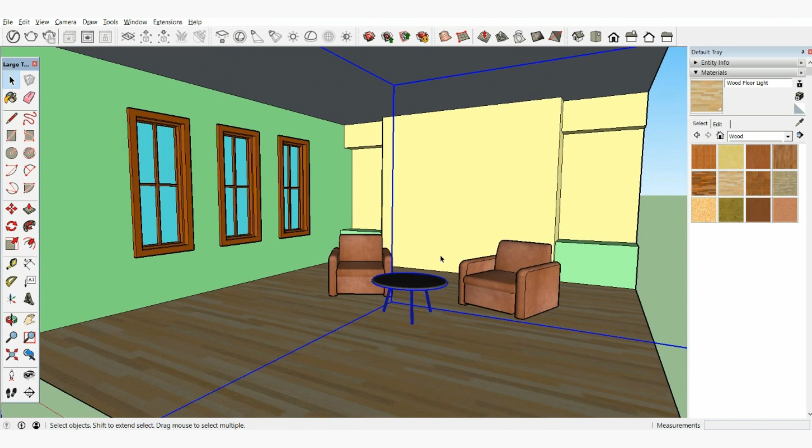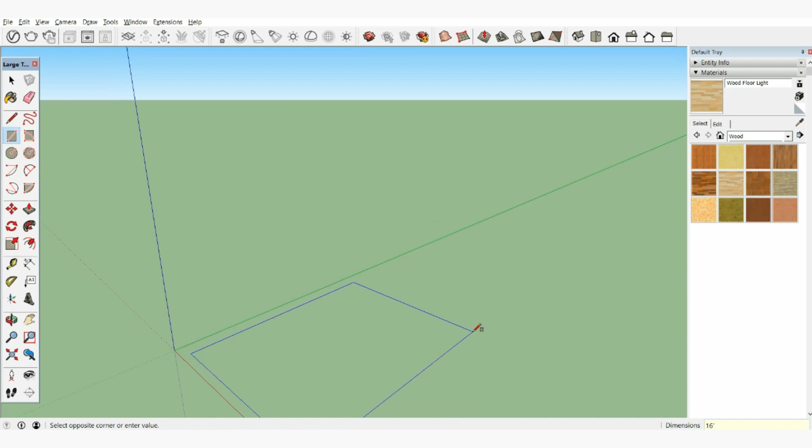If you were creating your own space, the first thing you need to do is to take some basic measurements of the size of the room and where the windows or other prominent elements are to accurately recreate the space. We know how to draw accurately in SketchUp from the previous video. For our example, let's begin by drawing a room that is 16 feet by 20 feet long and pull it up 9 feet. When you're working only on an interior room, it's often helpful to erase some of the walls. We can always draw them back in later.

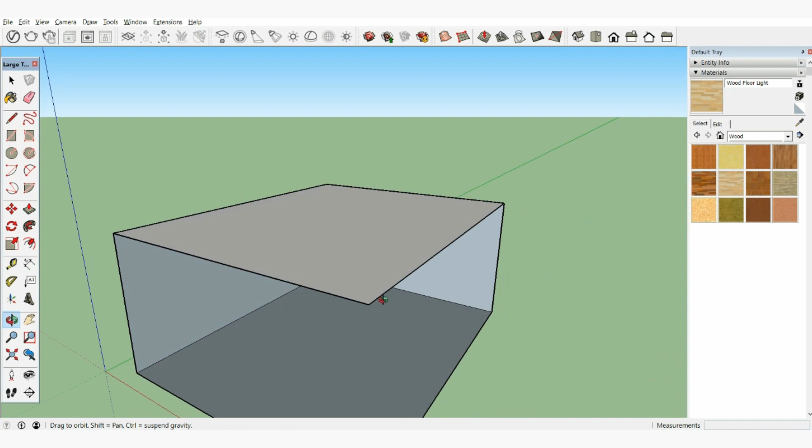Using the eraser, erase this corner edge, which will delete two of the sides. You will see the inside surfaces are a different color from the outside surfaces that we have been working on, but it will have no effect on our example, and we are going to paint these surfaces anyway. Navigate to get a good view of the back surface. Let's use a new tool to help us lay out some guidelines. The tape measure tool can measure between points in SketchUp, but it will also create guidelines we can reference.

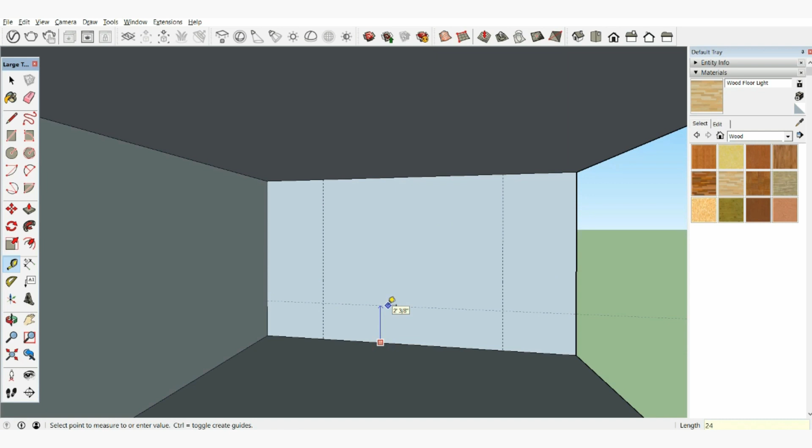Click once on this corner edge and start moving your cursor this way. Type 40 inches to create a guide 40 inches from that edge. Now repeat this process from the opposite edge. Create a guideline that is 24 inches high and a final guide that is 18 inches down from the top edge. With these guides in place, let's add detail and create a built-in structure. Draw 3 rectangles using the guide intersections here, here, and here.

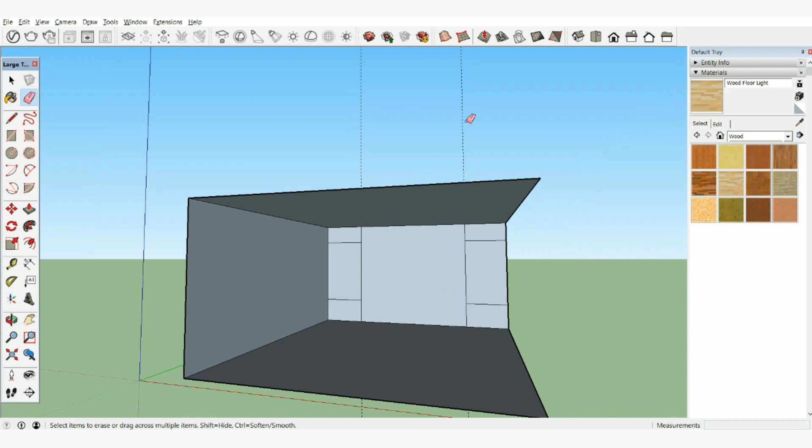So now we can delete our guides. You can delete guides with the eraser tool, but some of our guides are now hidden behind edges. You can see this by zooming out. Zoom out far enough to see all the guides and erase them, or you can also delete all the guides in your model by going to the Edit menu and choosing Delete Guides. Navigate back into your room.

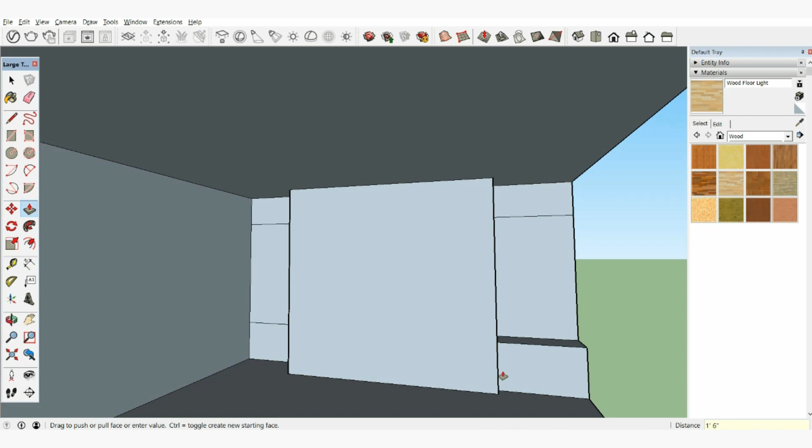Use push pull to pull this middle surface out 24 inches. Now pull this lower surface out 18 inches. We need to pull the far surface out 18 inches as well, but rather than manually inputting the distance, we can use inferencing. Click once with push pull on the far surface to start pulling it and leave the surface with your icon. Watch how hovering over various surfaces will pull it out to match. We can simply infer to this near surface and click on it to finish.

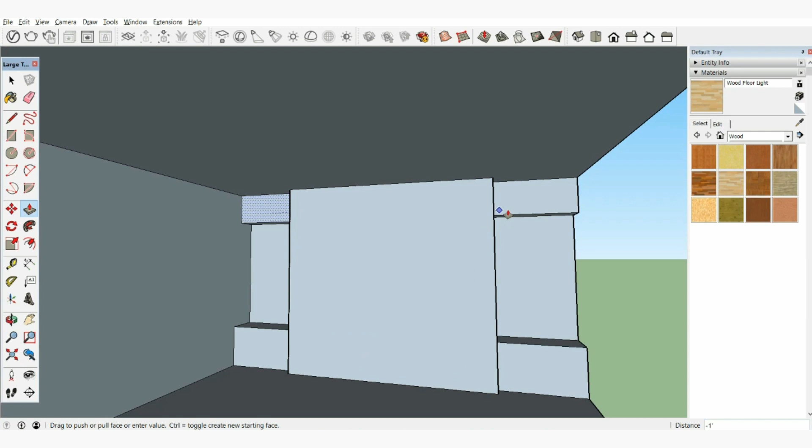Try again on these upper surfaces. Pull one out 12 inches, then pull the other surface out and watch how it will infer to the other surfaces. Remember, you will click once on the first surface to start the push pull, but you will finish by clicking on the other surface.

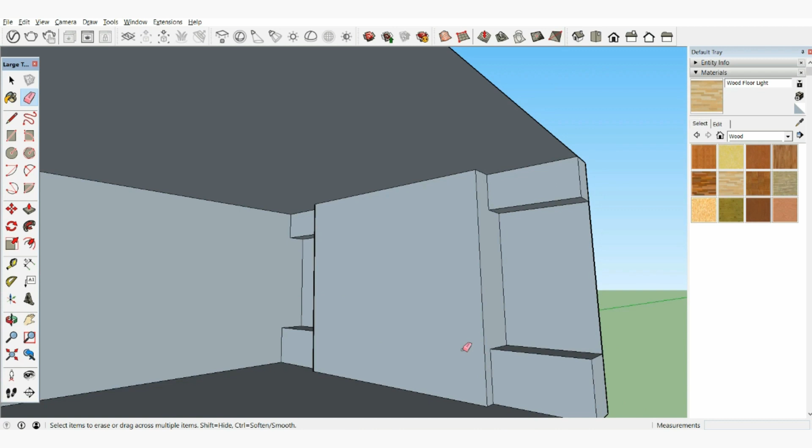It's good modeling technique to keep your model clean. Let's erase these extra edges created from our push pull. Anytime you have surfaces that are coplanar, you can erase these edges separating them. This is called healing the surface. Zoom in if you need to erase the unnecessary edges. We need to navigate to the other side and erase those edges as well. When you do, it's tricky to find the ideal view and it's easy to orbit outside of the wall surface.

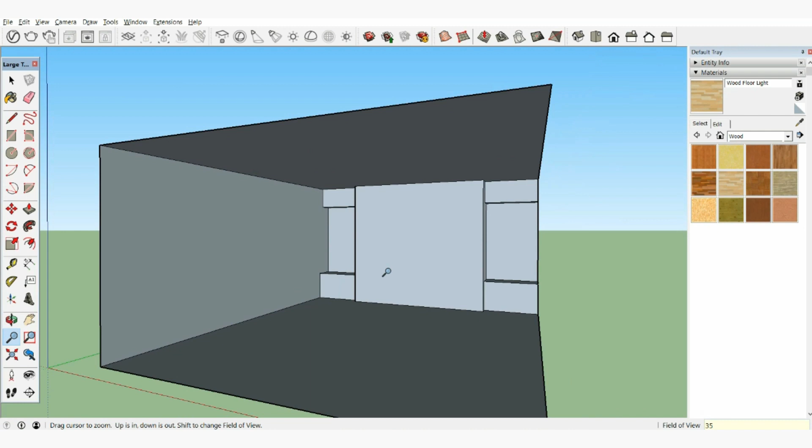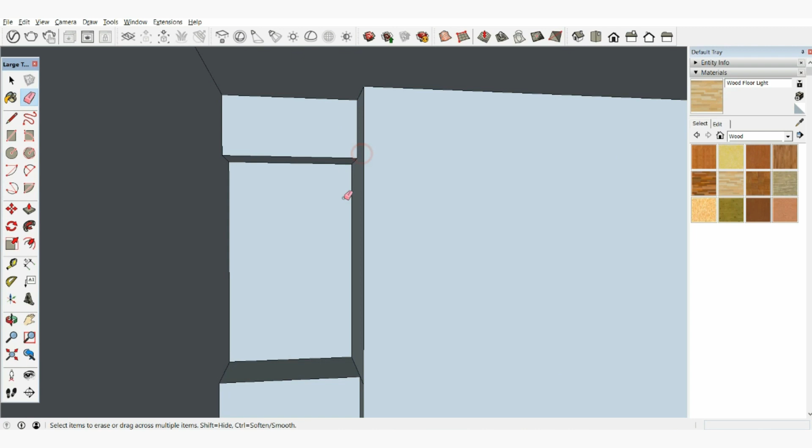Try this. Navigate back to a full room view, then choose the zoom tool. Look down in the measurements box. It shows you your field of view is 35 degrees. You can change this just like changing the lens of a camera, allowing us to see more perspective in our view, which is particularly useful for interior scenes. Type 50 and press enter. Now the field of view shows 50 degrees and we have a broader view of our scene. Navigate back to the corner and find a good view to erase the extra edges.

With that done, let's turn our attention to creating some windows. Navigate to a good view of this wall and use the tape measure to create a guide 5 feet from the far wall. Create another guide 30 inches from the first. Now create a guide from the bottom edge and infer to our built-in structure to finish it.

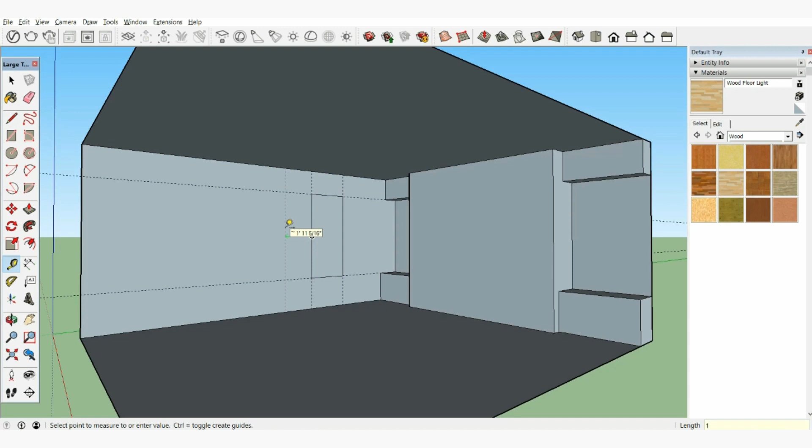Do the same from the top edge so our windows will line up with other elements in our room. Draw a rectangle using the guides for our window. Our room will have 3 windows on this wall and they'll be 18 inches apart. Creating a guide 18 inches from our new window will be necessary.

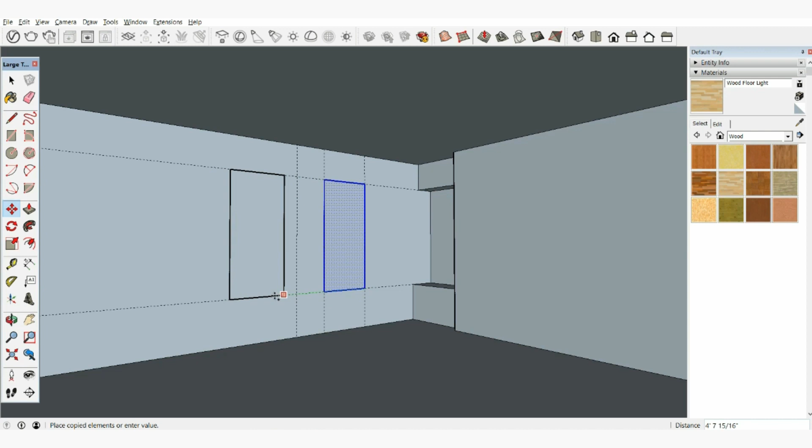Now select the new rectangle, then the move tool. Move the rectangle from this lower corner and start moving it along the wall. While still moving the rectangle, press the control key on a Windows machine or the option key if you are on a Mac. This leaves the original shape and creates a copy for you to move. Use the guideline reference to place the new rectangle. Practice this again for the third window.

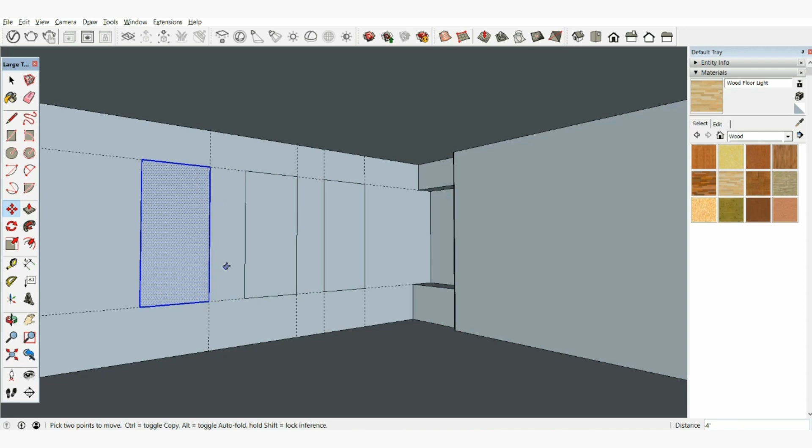Create a guideline 18 inches from the new window. Select and move a copy of the window by pressing control, or option on a Mac, and remember to move it exactly by moving from a corner to another. We are finished with the guides, so go to the edit menu and choose delete guides to erase them all.

To make the windows more detailed, we'll use the offset tool and introduce some new tips to help you work quickly. Zoom into one of your windows and offset the surface inwards 3 inches. Then select the inner surface and offset it 1 more inch. Now use the line tool and draw 2 crossing edges from the midpoints of the inner surface.

Finally, select one of the new rectangles created by crossing edges and offset it in half an inch for a window mullion. SketchUp will remember the last distance you offset, so rather than typing in a value for the remaining window mullions, select another surface, then using the offset tool, double click on that surface. It will offset it the exact amount of the last offset. Try again on the 2 remaining rectangles. Select the surface, then use the offset tool and double click to quickly offset it by the last amount.

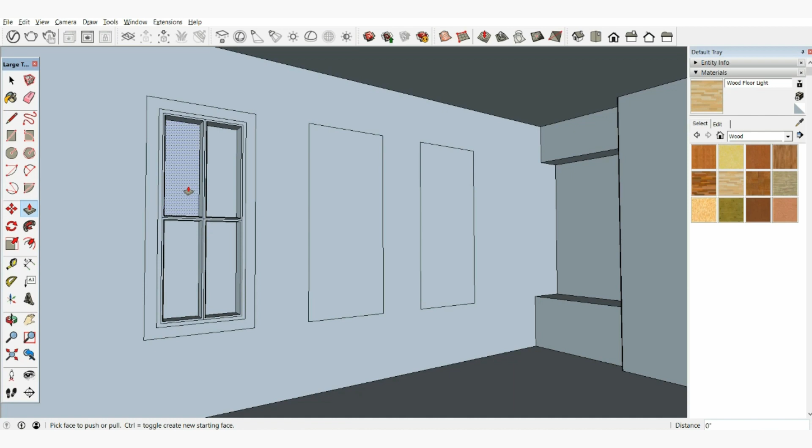Double clicking also works with push pull. Try selecting then pushing one of the windows in, then select a new window and double click with push pull on a different window. Continue this for all windows. Select the surface, then double click with the push pull tool to push it the same distance.

To push the window mullion back, let's first zoom in and erase the crossing edge to heal this into one surface. Then push it back and also pull the other surfaces in or out to create an interesting window and frame. Now we need to repeat this process for our remaining windows, and because we have built one, we can use inferencing to quickly repeat the process.

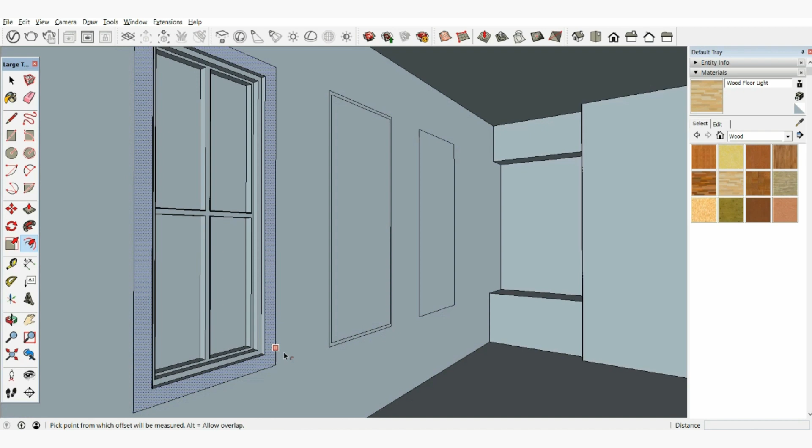For example, I can offset this surface from this lower edge and infer to our completed window for the correct distance. Although we are offsetting the whole surface, choosing the right edge to start the offset will determine which inferences are available to you. So in our example, we want to offset from the horizontal edges to infer to parallel edges. Offset the frame inferring back to the complete window.

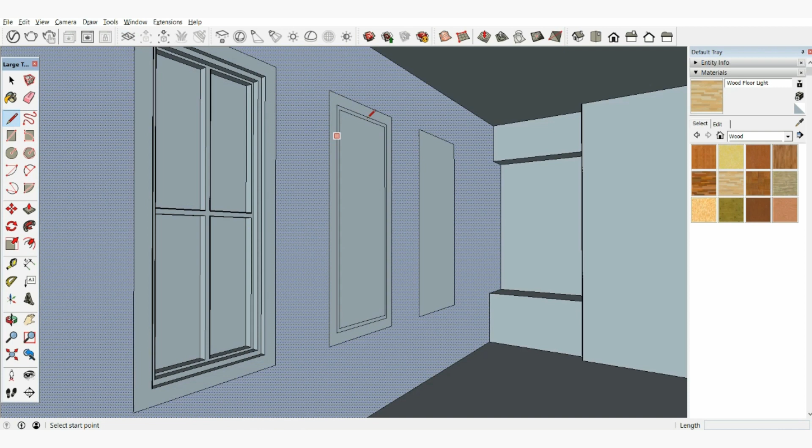Divide the windows with 2 edges drawn from the midpoints, then offset one surface using the inference and the remaining window surfaces by double clicking as before. Use push pull and inferences to complete this window so it's an exact replica of the first window. This third window is available for you to continue practicing on. Repeat the steps we have taken to replicate another window.

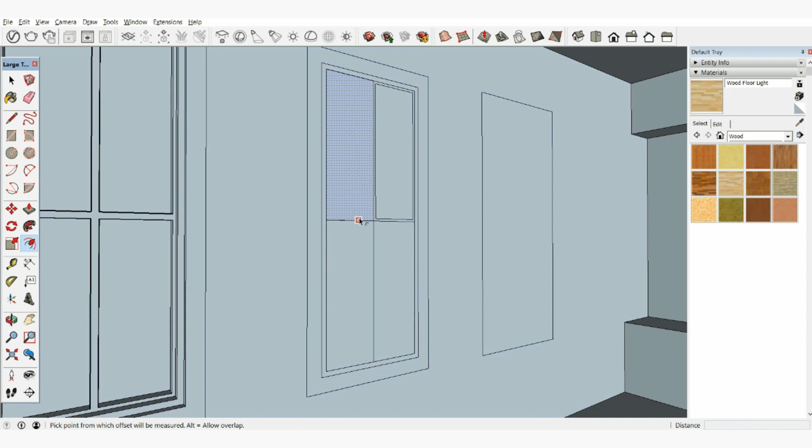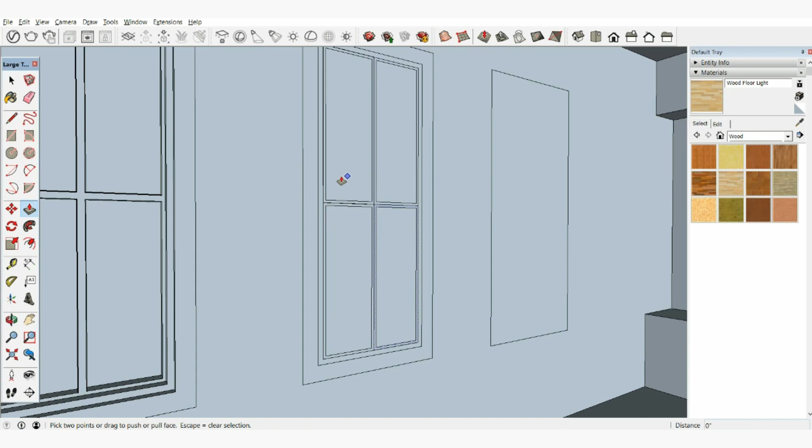Of note, we are drawing these windows manually to practice these drawing techniques, but in our next video and other videos you'll learn about better techniques for creating copies and repeating elements, but this is beyond the scope of this video. At this point our example has become interesting, but color will help a lot. So let's apply some paint and materials.

Applying color is one of the few tasks that is slightly different on a Mac versus a Windows machine, so we'll cover both. The basics are the same though. Pick a material and paint it to surfaces in your scene. Select the paint bucket tool to bring up the color or materials browser. On a PC you are shown a default palette of colors to pick from, and on a Mac you are given a color wheel to pick from.

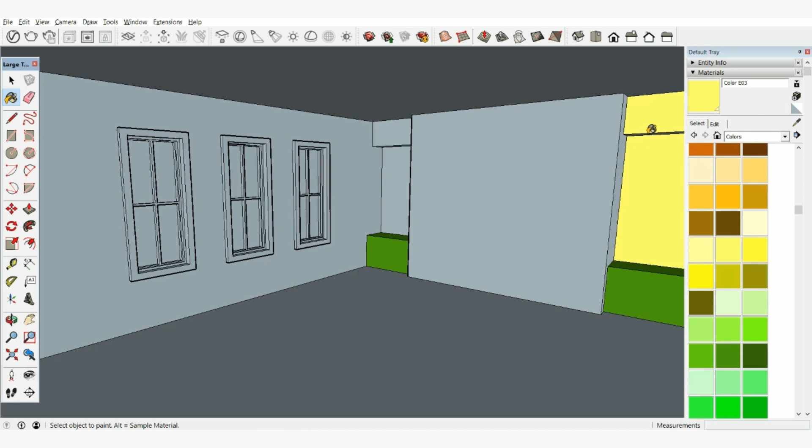Choose a color and then click on a surface to paint that color. Continue painting surfaces in your model. Pick different colors and try various color schemes in your model. Navigate around as needed to get different sides for your walls, but don't paint the windows yet. For the windows, we'll introduce a tip to make the process easier.

To start, let's pick a pale bluish color to represent the glass in the windows. The trim, however, has lots of little surfaces to work around and paint.

Try this, since our window trim is all still the default blue color. We can paint it all at once by holding the Control key on a PC or the Option key on a Mac. Choose the trim color, hold down Control or Option, and click on one window trim surface to paint all connecting surfaces of the same color.

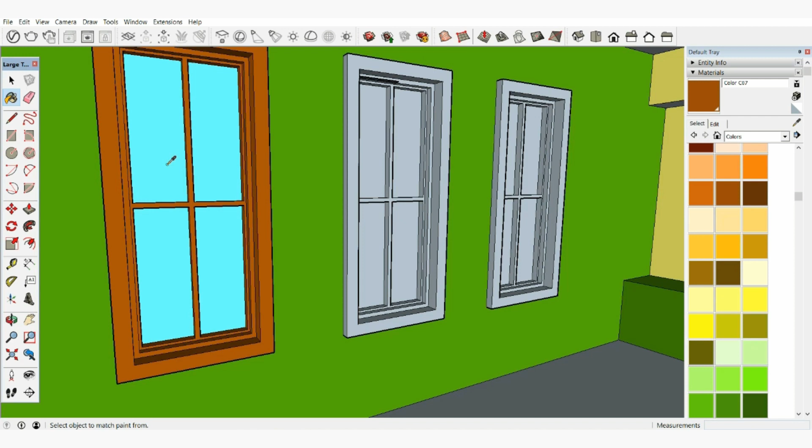With one window done, we can quickly complete the other two. However, we need the bluish window color again. With the paint bucket active, hold the Alt key on a PC or Command key on a Mac to turn the paint tool into a sampling tool. Then click on one of the painted windows to sample and pick that color for use.

Now paint the remaining windows. Then hold Alt or Command again to sample the trim color, and paint the remaining trim as before by holding the Control or Option key.

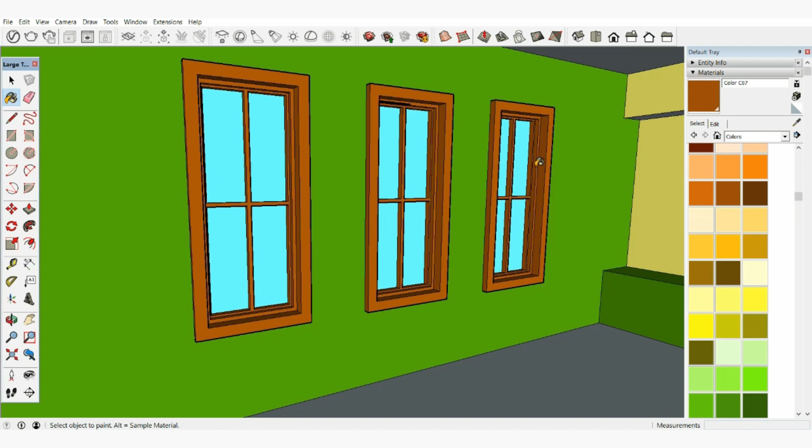In SketchUp, you can apply full textures and materials, not just colors. On a Windows machine, click the house icon to see what materials have been applied in your model, and open the fly-down menu to access textures to paint in your model. On a Mac, choose the brick icon to access additional textures. Paint some more materials into your scene.

It's also possible to create your own textures to use in SketchUp. See our documentation for more information.

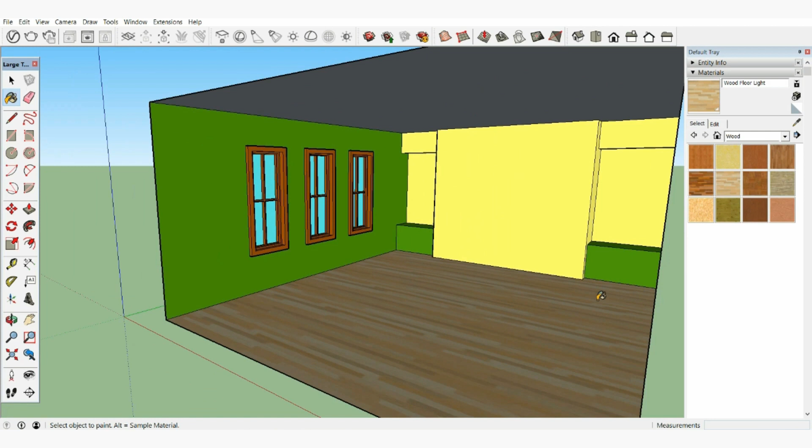To complete this example, let's add some furniture from the 3D Warehouse, which is an online repository of millions of models where anyone can upload and share SketchUp models. As long as you are connected to the internet, you can search the 3D Warehouse directly from SketchUp.

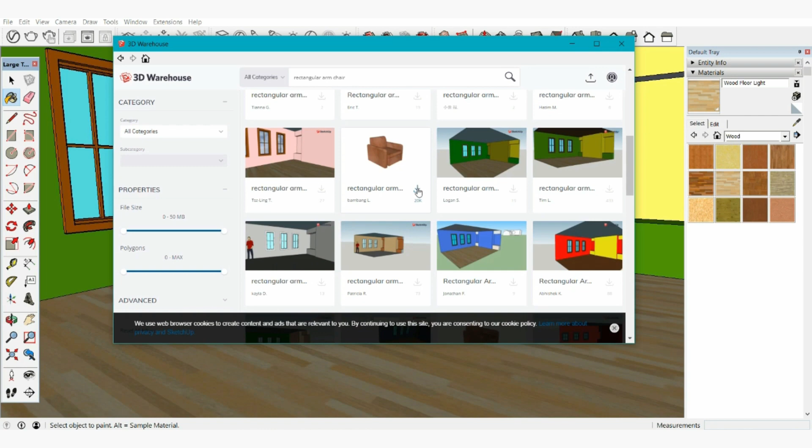Go to the Window menu and choose 3D Warehouse. From here you can browse or search for any models you would like. Searching for chair will return thousands of results, so be more specific to refine your results. Simply click on one of the results, then click download to place it in your model.

With the new model in your scene, let's look at how to properly move it around the room. The chair is grouped together, and we'll learn more about groups in the next video. But objects that are grouped can be moved and rotated like a single object with the move tool.

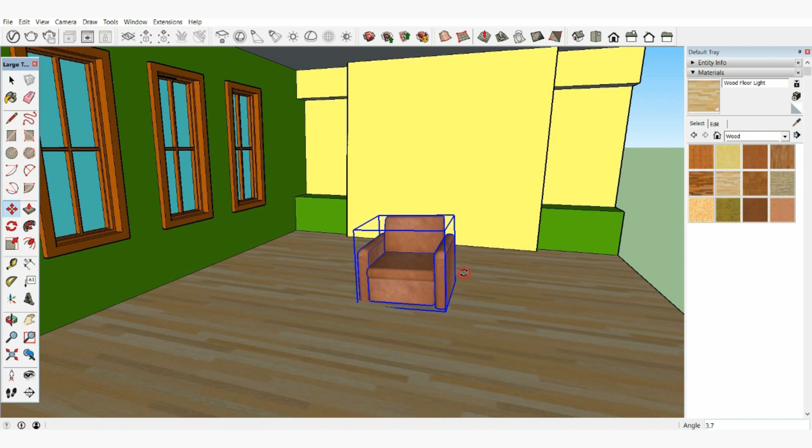Select the chair, then pick the move tool and hover the cursor around the chair. There is a bounding box indicating that group, and small red points show up on the different sides. Hover over one of the red dots and a rotation gizmo appears. Click on the red dot to rotate the chair in that axis, and click again to finish. You can rotate freely or in 15-degree increments by hovering the cursor close to the rotation gizmo.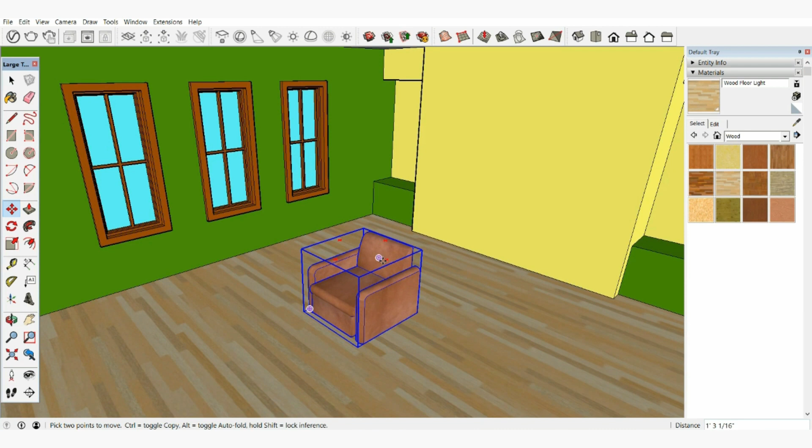Orient the chair as you'd like, and let's talk about moving it in your scene. You may want to move the chair over here, and suddenly it's buried in the floor - probably not what you expected. Let's undo that. When you move objects in SketchUp, you always need to be aware of where you are starting and finishing the move.

For example, if I click on the armrest to start moving the chair, it will move that point to other elements in the scene that I hover over. To be sure the chair stays on the floor as I move it around, I'll move it from a point that should touch the floor, the leg corner, for example.

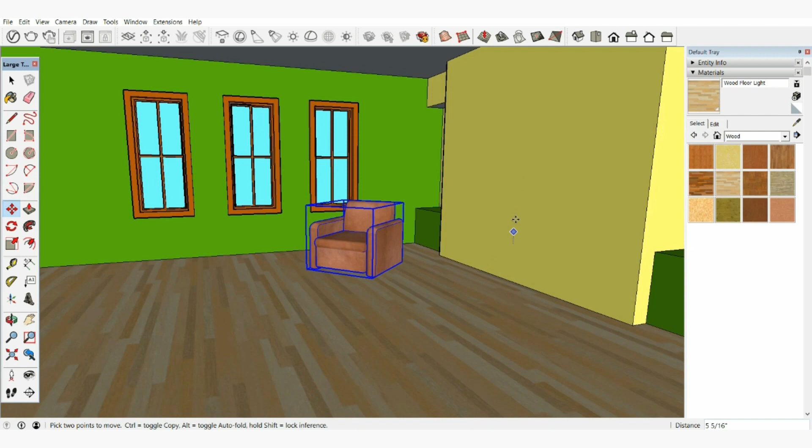Now I can move it easily to another point on the floor. Another way to quickly move it is by pre-selecting the chair, then using the move tool. I can click on some points on the floor and move to another point on the floor. Remember though, you started moving from this point on the floor, so you must move to another point on the floor. You can still move the chair up by moving it to some point on the wall.

Always be aware of the red, green and blue directions as well, so you don't accidentally move the chair straight up. Remember, you can press the Control key on a PC or the Option key on a Mac to create a copy while moving the object.

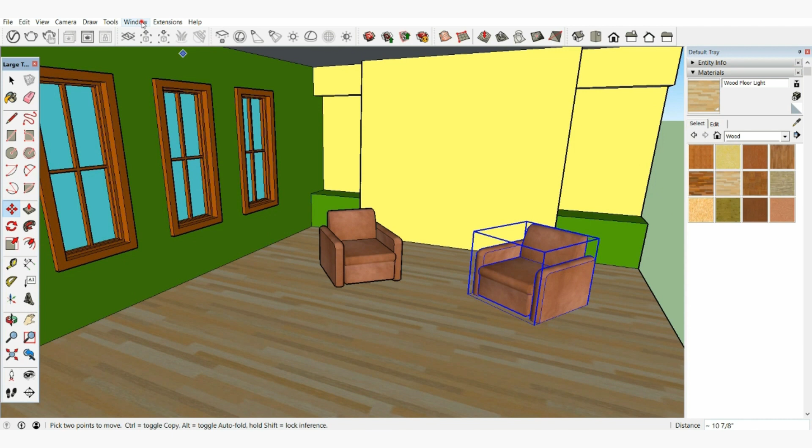Now practice by finding more items from the 3D Warehouse to add to your scene and placing them around the room. In the next video, we'll learn more about creating groups and copying objects by creating a small table.